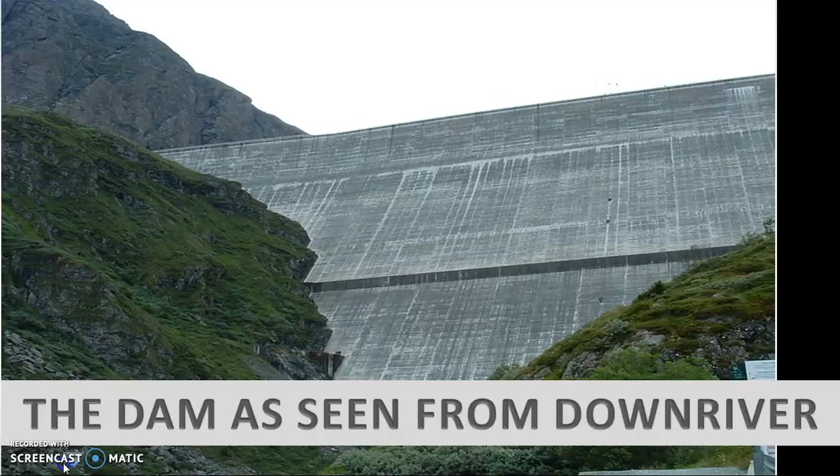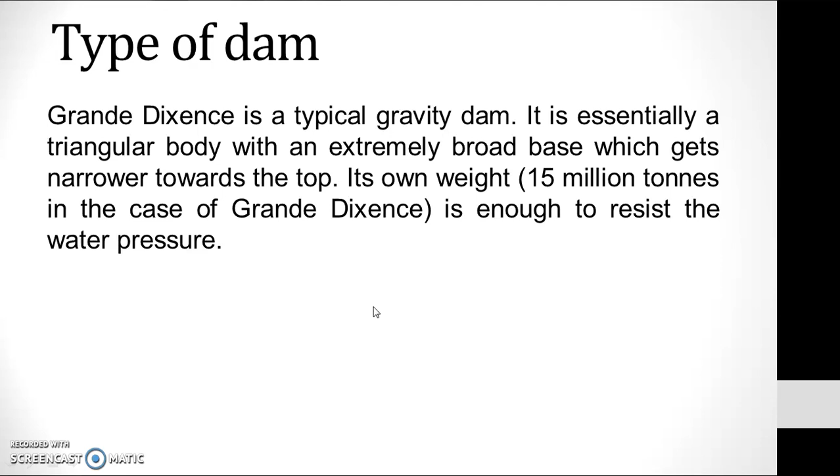In this image we can see the downriver view of the dam. Grande-Dixence Dam is a typical gravity dam. It is essentially a triangular body with an extremely broad base which gets narrower toward the top. Its own weight is about 15 million tons, which is enough to resist the water pressure.

Let's talk about the geographic information of Grande-Dixence Dam. Grande-Dixence Dam is located in Switzerland in the canton of Valais on the Dixence River. It supplies water to the Rhone Valley. It holds back Lac des Dix lake behind it.

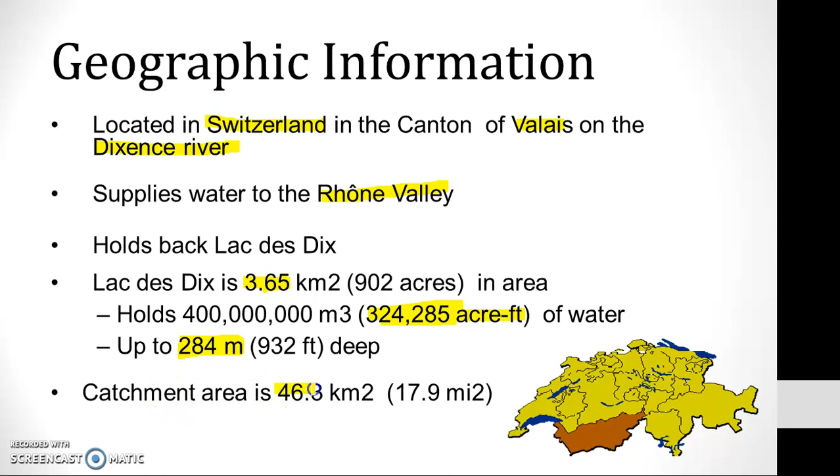The area of the lake is about 3.65 square km and it holds back 3,24,285 acre feet volume of water, up to a depth of 284 meters of water. The catchment area behind the dam is 46.3 square km.

Physical information of Grande-Dixence Dam. Grande-Dixence Dam is the 5th tallest dam in the world and the highest gravity dam in the world. Its height is 285 meters. It is about 695 meters long and the width at the base is 200 meters, which is sloping to only 15 meters wide at the top.

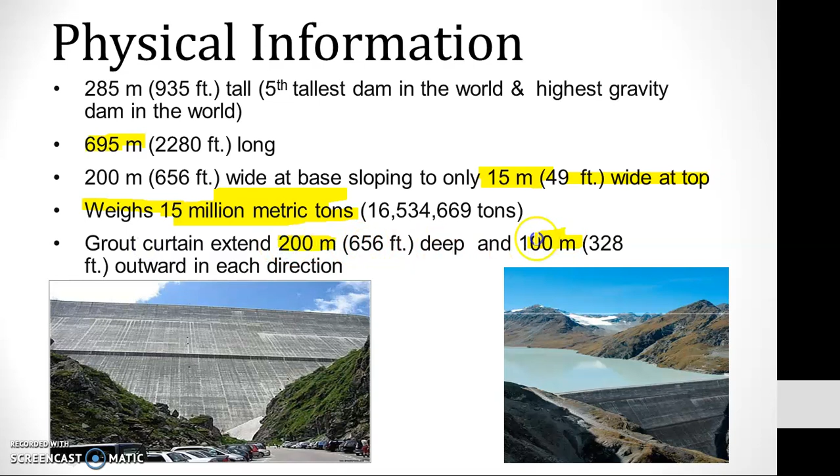The weight of Grande-Dixence Dam is 15 million metric tons, which is enough to resist water pressure. Grout curtains extend 200 meters deep and 100 meters outward in each direction.

So let's talk about the objectives of this dam, why this dam is constructed and what is the purpose of this dam. This dam is built to produce hydropower. Grande-Dixence represents 1/5 of storable energy produced in Switzerland.

The dam strives to optimize water levels so there is maximum availability before heavy demand periods, maximum profit by calculating the cost of pumping water in summer and income by generating energy during winter. Grande-Dixence Dam now serves as a recreation area and also tourism around the dam is quite popular.

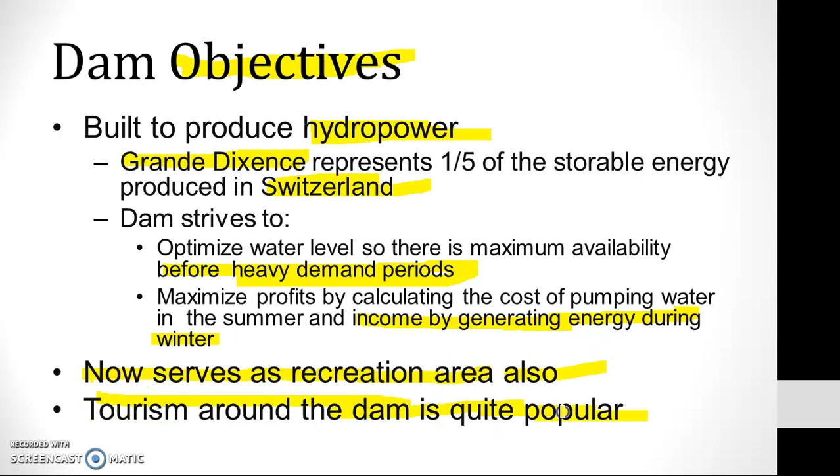60 lakh cubic meters of concrete was used during the construction of Grande-Dixence Dam. It took 10 years to complete the construction. The major issue at the time of construction of Grande-Dixence Dam was how to enlarge the current Lac des Dix lake and how to bring water from the neighboring valley.

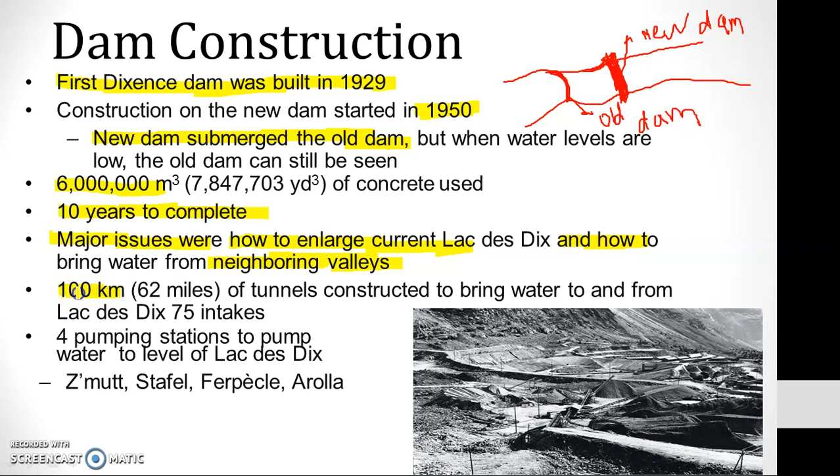100 km of tunnels were constructed to bring water to Lac des Dix lake from 75 intakes. 4 pumping stations were constructed to pump the water to the lake, which are Z'Mutt, Stafel, Ferpècle, and Arolla.

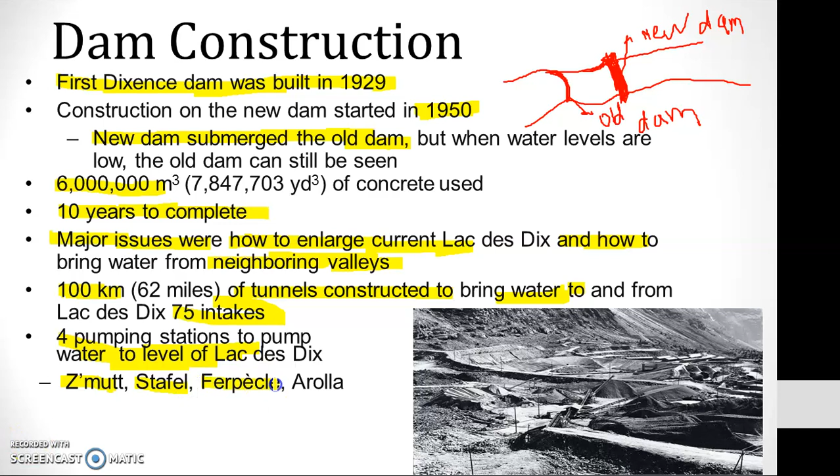At the time of Grande-Dixence Dam construction, 2 large accidents occurred: a roof section of the Chillon tunnel collapsed, and an avalanche swept away 3 inspectors. At the time of construction of the dam, the environment was very challenging.

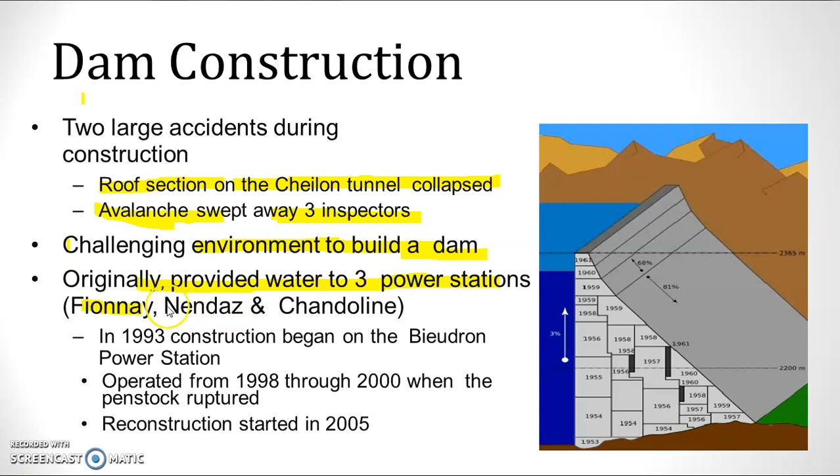The dam originally provided water to 3 power stations, which are Fionnay, Nendaz and Chandoline. Now let's talk about the pumping stations of Grande-Dixence Dam.

First of all, we are talking about Z'Mutt pumping station. It is fed by water from the Bis, Gorner, and Schali glaciers. In this pumping station, 4 pumps pump up to 14 crore cubic meters of water per year. It starts pumping at an elevation of 1972 meters and pumps to the Trift Tunnel at an elevation of 2400 meters, located almost entirely underground.

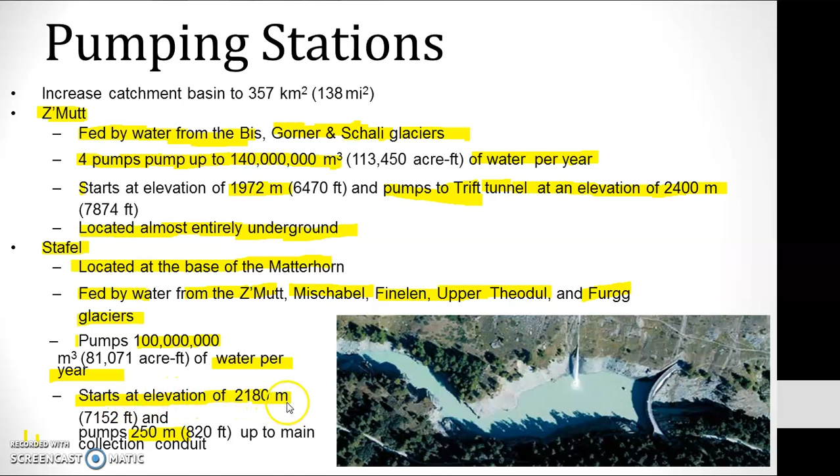Now let's talk about Stafel pumping station. It is located at the base of the Matterhorn. It is fed by water from the Z'Mutt, Mischabel, Finelen, Upper Theodul and Furgg glaciers. It pumps 10 crore cubic meters of water per year. It starts pumping from elevation 2180 meters and pumps up to 250 meters height.

Let's talk about the power stations of Grande-Dixence Dam. First of all, we discuss Fionnay Power Station. It consists of an underground pressurized tunnel 9 km long, bringing water from Lac des Dix lake. The average slope of the tunnel is 10%. The penstock of this power station descends 800 meters with a slope of 73%. The capacity of this power station is 290 megawatts, located at an elevation of 1490 meters.

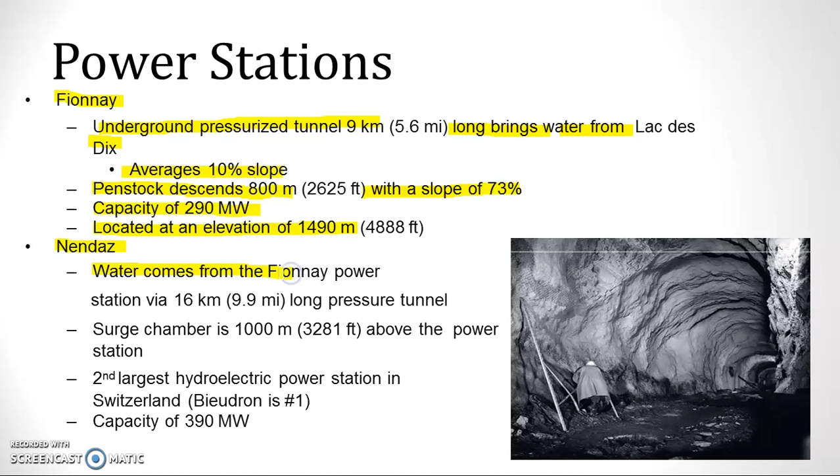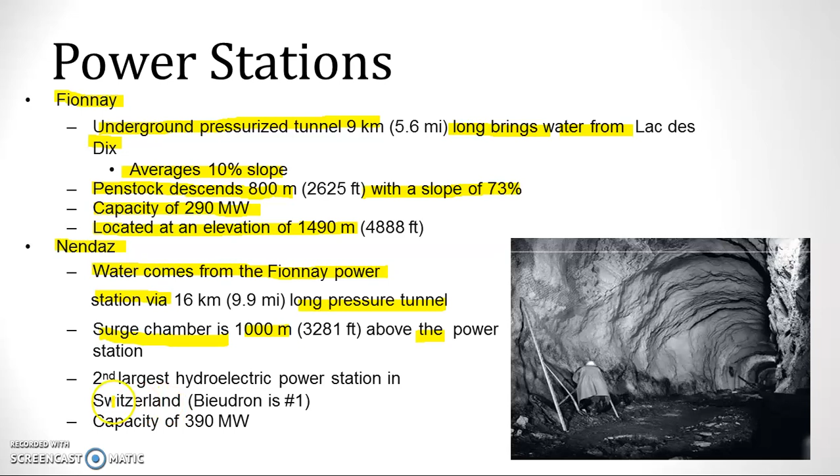Now let's talk about Nendaz Power Station. In this power station, water comes from Fionnay Power Station via a 16 km long pressure tunnel. The surge chamber is 1000 meters above the power station. It is the second largest hydroelectric power station in Switzerland. Its capacity is 390 megawatts.

The next power station is Bieudron Power Station. It was constructed between 1993 and 1998. It holds 3 world records. The height of its head is 1883 meters. The output of each turbine is 423 megawatts per turbine. The output per pole of the generator is 35.7 megavolt amperes.

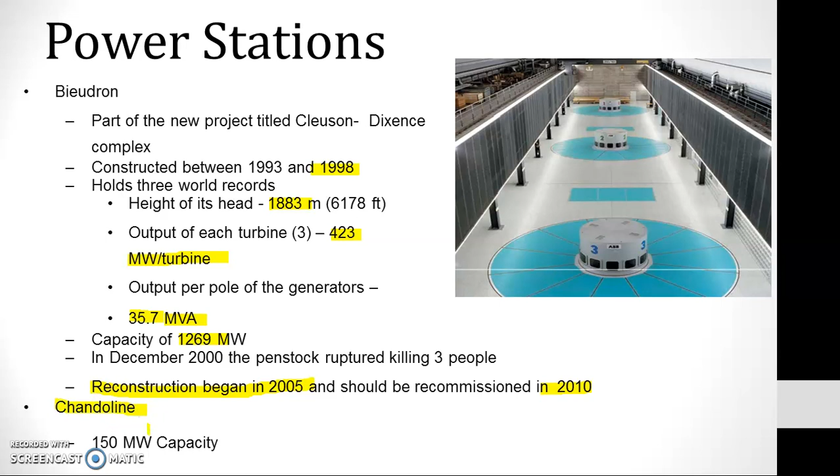The capacity of this power station is 1269 megawatts. In December 2000, the penstock ruptured, killing 3 people. Reconstruction began in 2005 and it should be recommissioned in 2010. Chandoline Power Station. Its capacity is 150 megawatts.

Let's discuss the locations of the installations, which are the pumping stations and power stations. As you can see here, the pumping stations are located here, Z'Mutt and the other stations. And the power stations are located here.

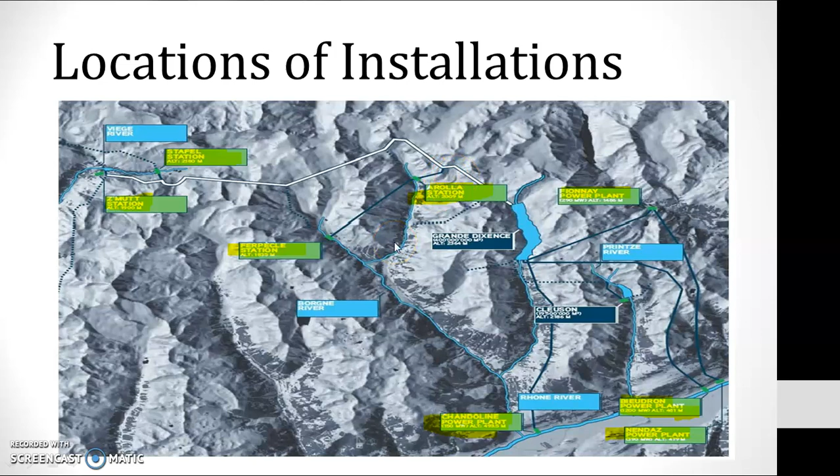In case of Grande Dixence Dam, pumping stations are very important because Grande Dixence Dam has no spillway. In that case, when the water goes above the height of the dam, the level of water is decreased by the pumping station. Pumping stations pump the water from the lake and maintain the water level behind the dam.

In this figure, the elevation of installations is shown. As we can see in the previous slide, the power station and pumping stations are located. Similarly, power station and pumping stations are located here in elevated view. As you can see, it is the elevation of all the stations which are located here. These are pumping stations, and all of these are power stations, as you can see here.

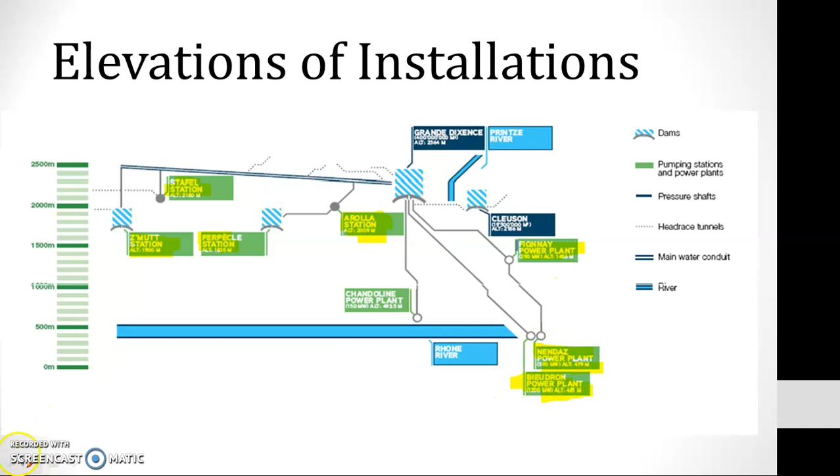Now let's talk about dam operations. The dam collects water from 35 galleries. Water is pumped into Lac des Dix by 4 pump stations. Water is pumped to full storage during the summer as glaciers melt, then drains out during winter. Power is generated by 3 power stations, which benefits the shareholders, and water then returns to the Rhone River.

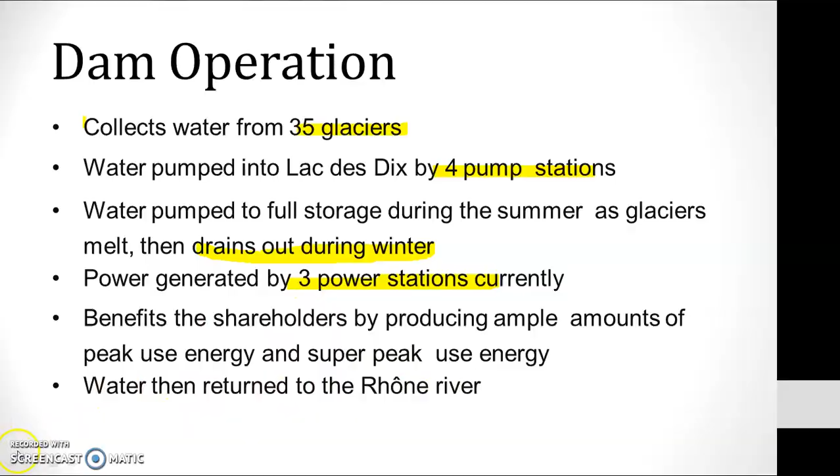When the water level gets lower, at that time we can see the old dam and new dam. The old dam is also known as the lower dam and the new dam is also known as the upper dam.

Now let's talk about interesting facts of Grande Dixence Dam. The Grande Dixence Dam's older, smaller predecessor is normally submerged in the lake, but the old dam occasionally becomes visible during times of low water. The Grande Dixence Dam has no spillway. If the water depth approaches the dam's top, pumping stations in other valleys stop sending water to Lac des Dix. Very rarely water spills over the top of the dam.

Unlike some hydroelectric dams such as Hoover Dam in the United States, the Grande Dixence Dam has no power turbine on site. Water is sent to generating plants at lower elevation. If all the hydroelectric plants downstream were operating at full power and no water was entering, the lake would be drained in about 2000 hours.

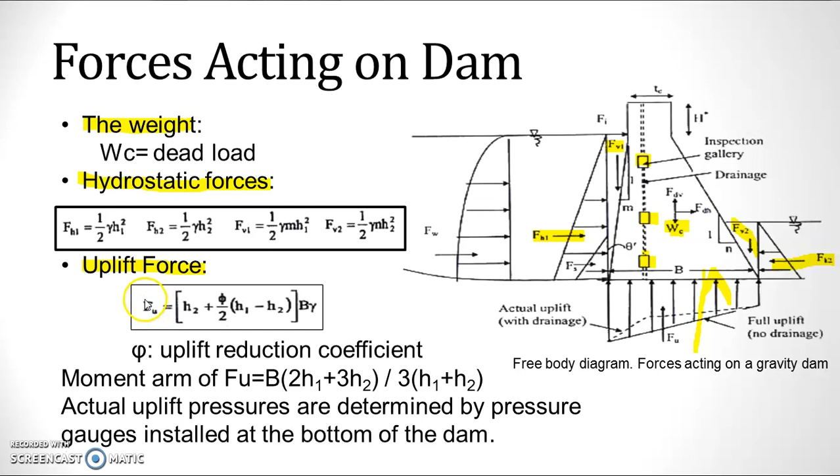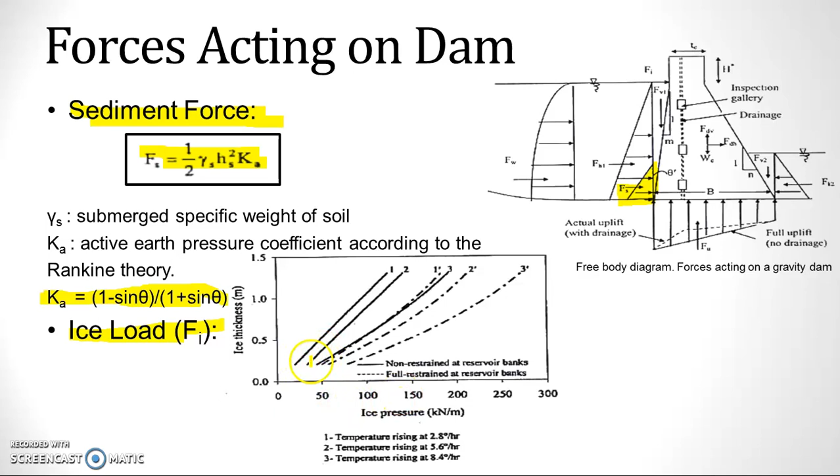Now let's talk about ice load. Ice load is dependent on ice thickness and the temperature rising or falling gradient. So we can make the graph between ice thickness and ice pressure. As you can see here, when the ice thickness increases, ice pressure on the dam also increases.

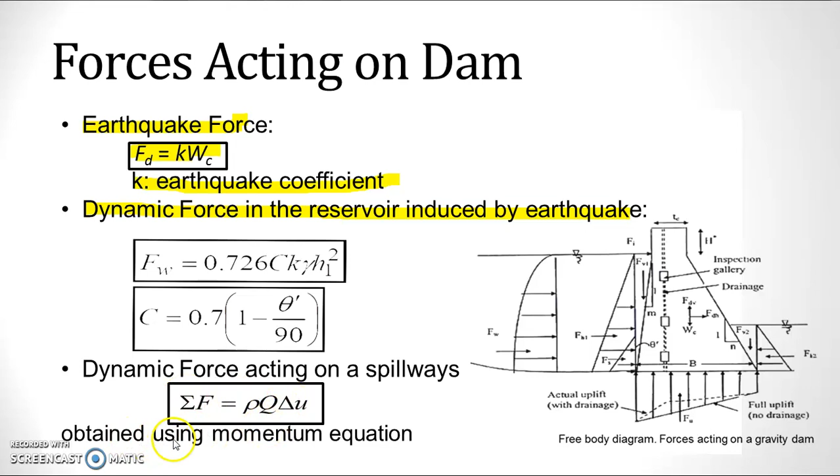Earthquake force. Earthquake force is calculated by using this formula, where K is the earthquake coefficient. Dynamic force in the reservoir induced by earthquake is calculated by using these formulas. Dynamic force acting on spillways is also calculated by using the given formula shown here, obtained by using the momentum equation. Wave force and temperature force also act on the dam.